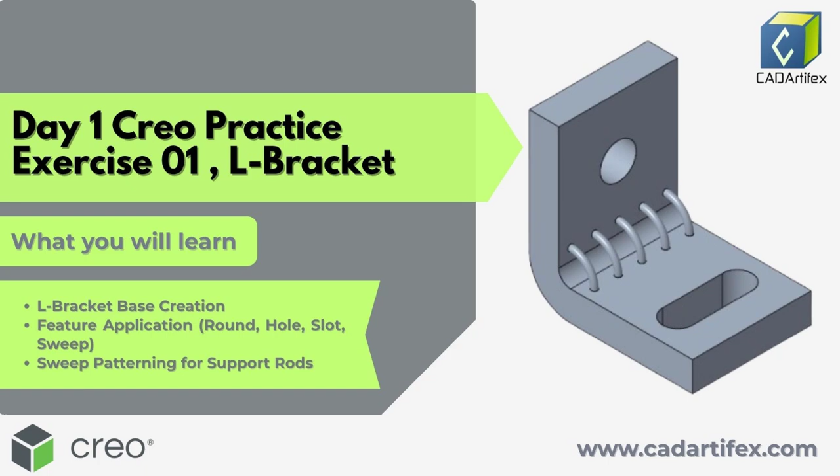In today's video, we're starting things off with a simple and useful part, the L bracket. It's a great model to get comfortable with the basics like sketching and using the extrude tool inside Creo Parametric. Don't worry if you're completely new, we'll go step by step and build it together. So let's open up Creo and get right into it.

Here's a quick look at the 2D drawing for our Day 1 model, an L bracket. We've got 2 equal arms, 55 mm long and 10 mm thick. There's a 12 mm hole on the vertical face and a slotted cutout on the bottom, 20 by 10 mm with round ends, and bend support rods with 2 mm diameter.

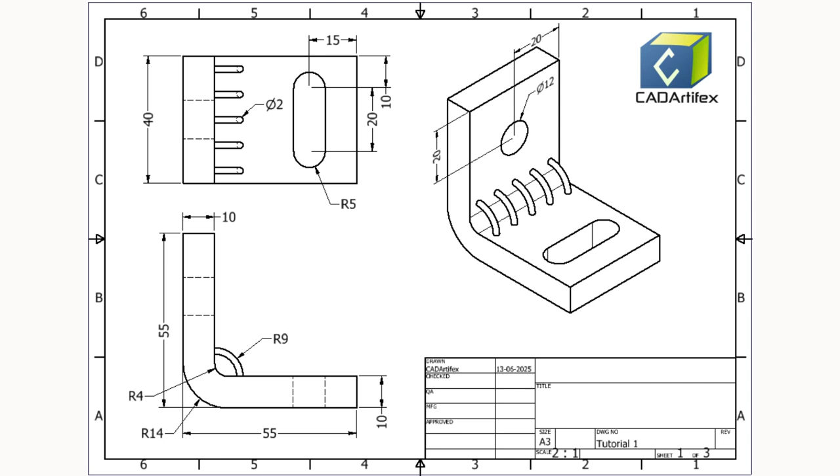And notice those smooth curves at the joint? That's a 14 mm and 4 mm radius blend. Simple design, but perfect to kickstart your Creo modeling journey.

Let's build it. Start a new part. Invoke the sketching environment by clicking on the new tool. Ensure that in the Type area the Part radio button is selected, and in the Subtype area the Solid radio button is selected in the dialog box. Enter the model name in the File Name field as L bracket. Uncheck the Use Default Template option and click OK. In the next dialog, select MMNS Part Solid Abs and press OK to proceed.

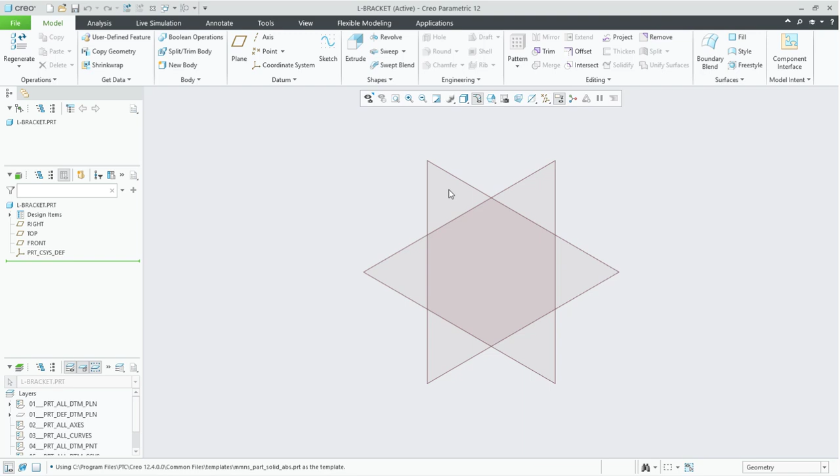Click on the Extrude tool and select the front plane. Now you are in the Sketching environment. Change the orientation to Normal by clicking on the Sketch View tool in the Graphic toolbar. Now we will create the L-shape extrude base feature.

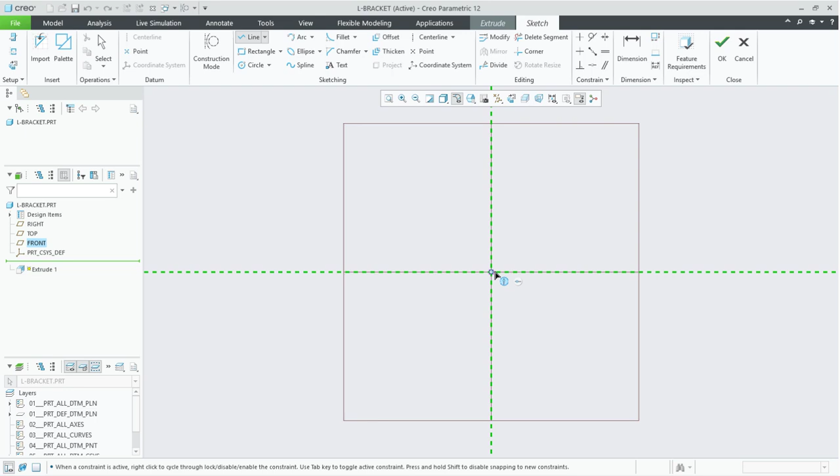Select the Line tool by clicking on it, move the cursor to the origin and click to specify the first point of the sketch, then move horizontally right and create a closed sketch similarly. Press the middle mouse button twice to exit the tool.

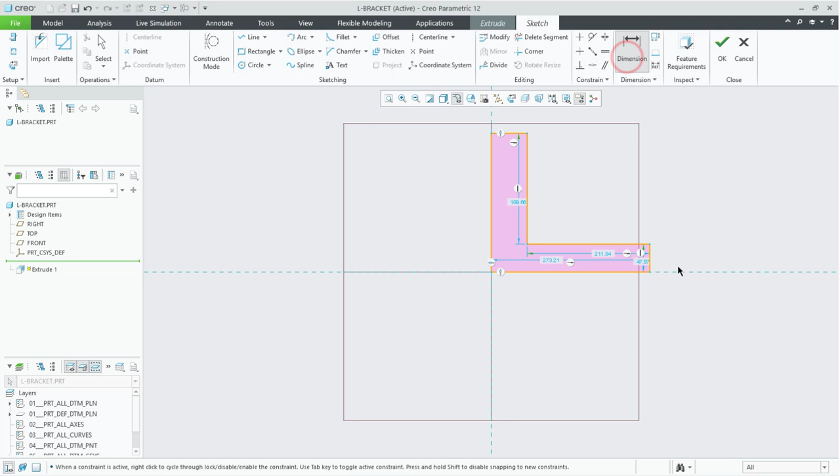Now it's time to change the dimensions according to the drawing. Click the Dimension tool and give this vertical line a value of 10. This horizontal line to be 55. Also this vertical line to be 55. And this horizontal line is 10.

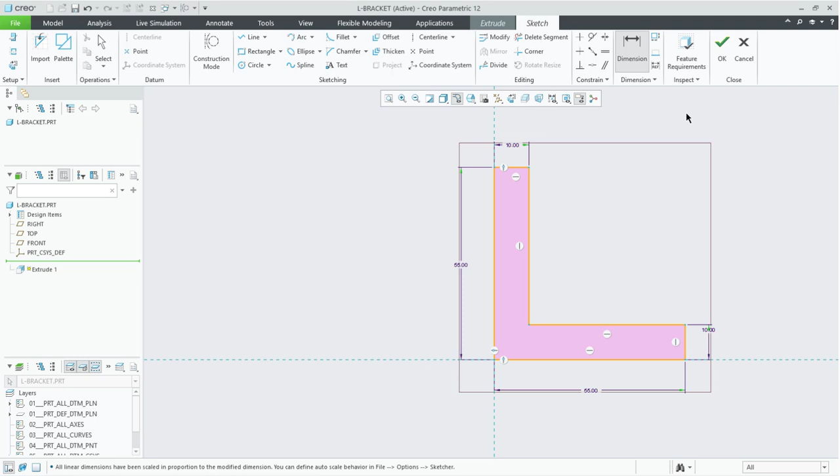Now exit the sketching environment by clicking on the OK green tick button in the Close group of the Sketch tab. Now you preview the Extrude Base feature with default parameters. First, change the orientation by clicking Ctrl+D or Standard Orientation in the Graphic toolbar.

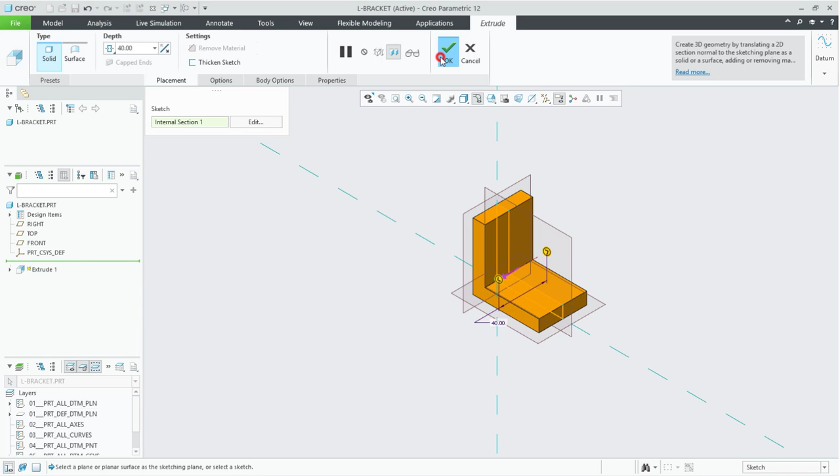Select the Symmetric option in the Depth option drop-down list and enter 40 in the Value field in the Depth area of the Extrude tab. Click on the OK green tick button in the Extrude tab. Now your base extrude feature is created.

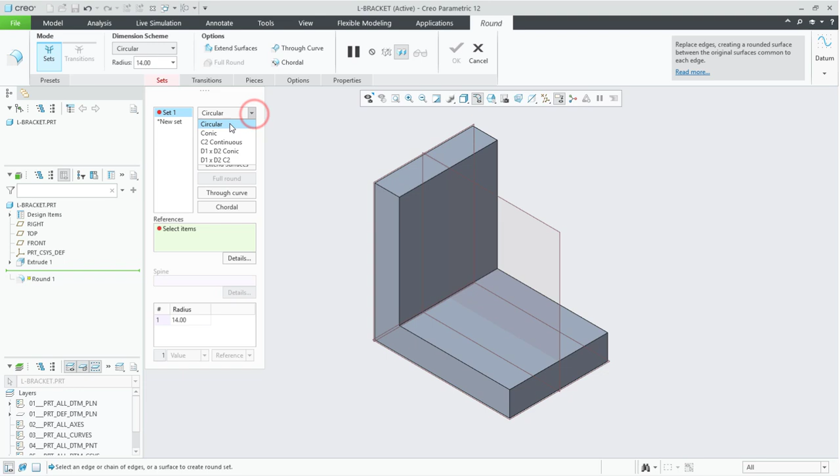Now it's time to remove the sharp corner by using the Round tool. Expand the Round tool flyout and select the Round tool. Enter 14 in the Radius field in the Round tab. Ensure that Set 1 is activated in the Set Collector field and also ensure that Circular is selected in the Profile drop-down list. Now rotate the model and select the outer intersecting edge. Now the Round feature appears on the outer edge.

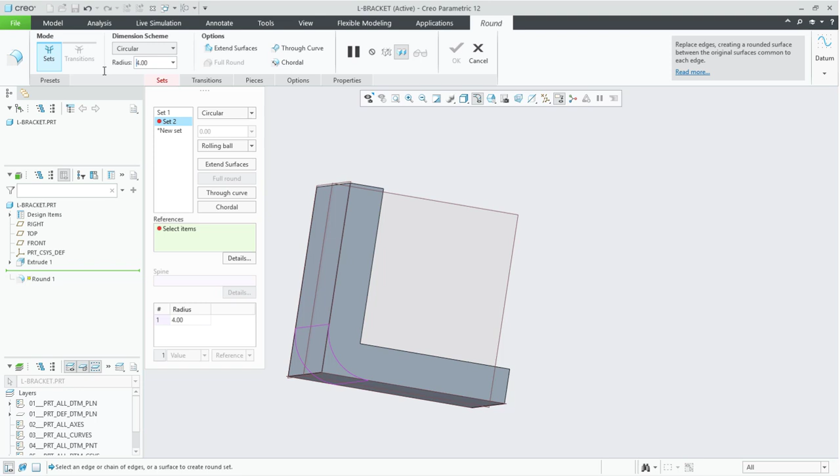Now click on the New Set button below Set 1 in the Set Collector field. You see that Set 2 is activated. Now enter 4 in the Radius field and select the inner intersecting edge. Exit the Round tab by clicking on the OK green tick button in the Round tab.

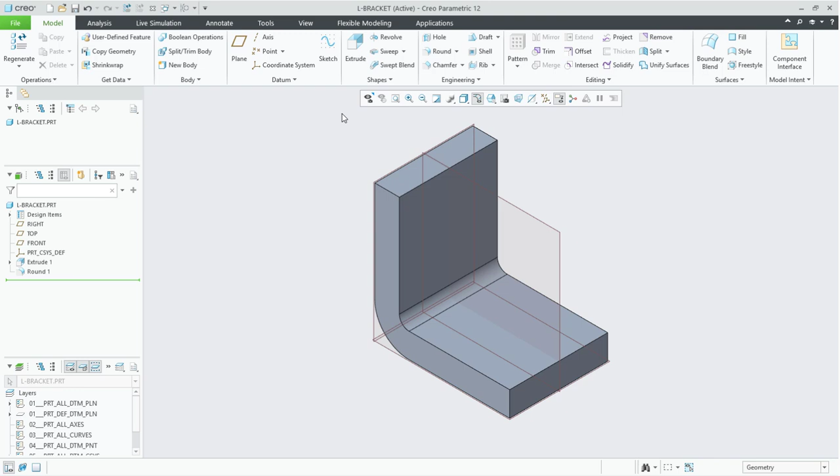Now change the orientation by clicking Ctrl+D or the Standard Orientation tool in the Graphic toolbar. Sketch the center-to-center slot. Select the Sketch tool from the Datum group and pick the top face of the base. In the Sketch dialog box, click on the Sketch button. Click the Palette tool, go to the Shapes tab and double-click on Racetrack 1 center-to-center.

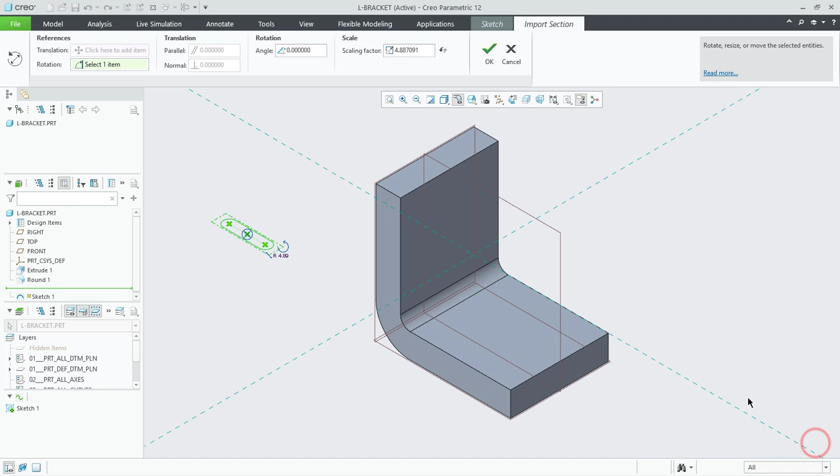Place it in the sketching area, then close the palette. Drag the center point of the slot to the base feature for alignment. In the Import Section tab, set the rotation angle to 90. Then click OK. Orient the view normal to using the sketch view, and add dimensions: distance between centers 20.

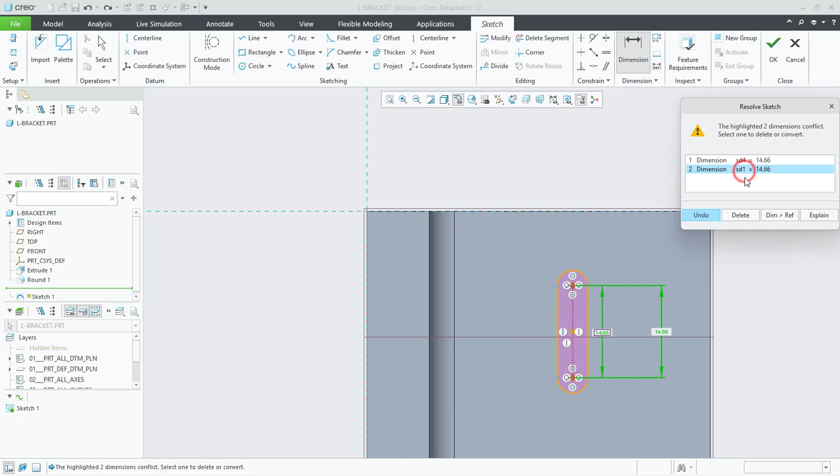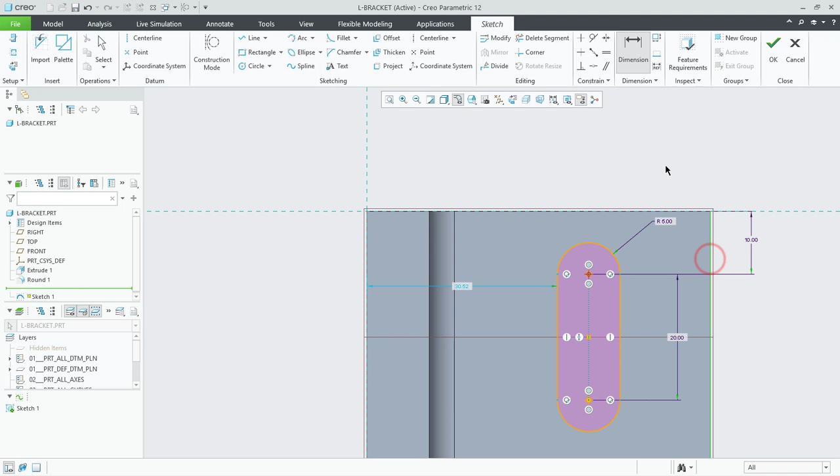If the Resolve Sketch dialog appears, delete any weak dimension and continue. Set the arc radius to 5. Set the distance from the arc center to the horizontal edge to 10, and the distance from the arc center to the vertical edge to 15. Once the sketch is fully defined, exit by clicking OK.

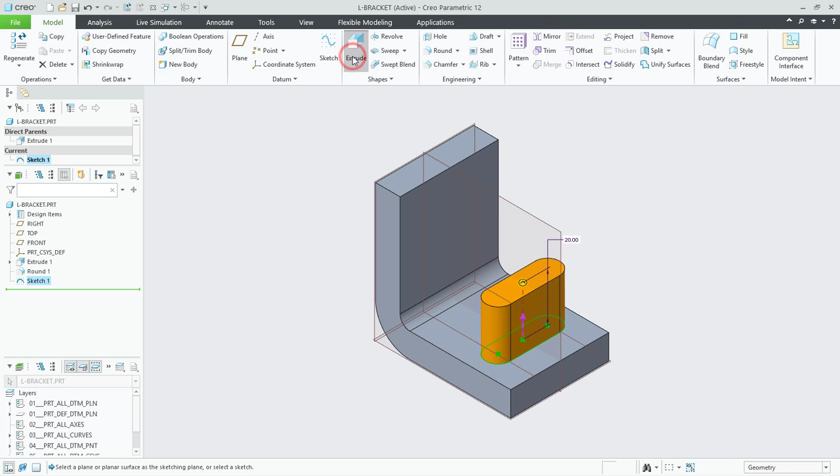Cut the slot. Now change the orientation by clicking Ctrl+D or using the Standard Orientation tool in the Graphic toolbar. Click the Extrude tool, click Flip, set the depth to Through All, and make sure Remove Material is selected. Exit by clicking the OK green tick button in the Extrude tab.

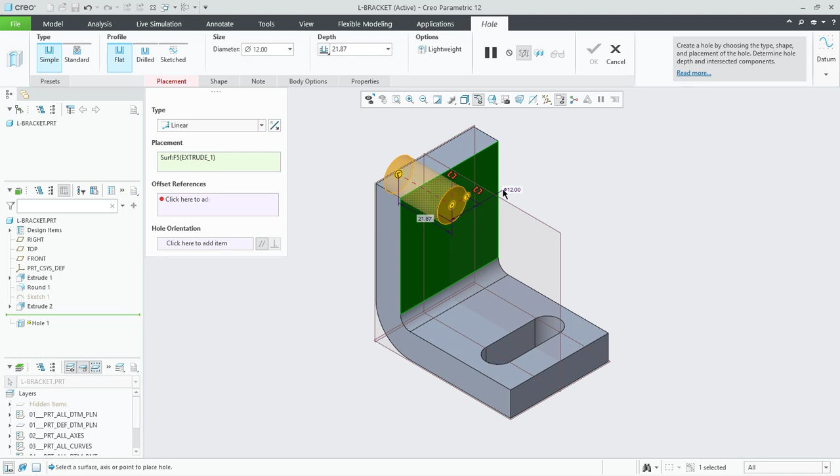Create the hole. Click the Hole tool from the Engineering group, then click on the right planar face of the base feature to place the hole. Under Placement, click the Offset References Collector area and select two edges while holding the Ctrl key. You can also drag the preview handles to adjust the placement. Set the value 20 in both the Edit field and the Offset Reference Collector area.

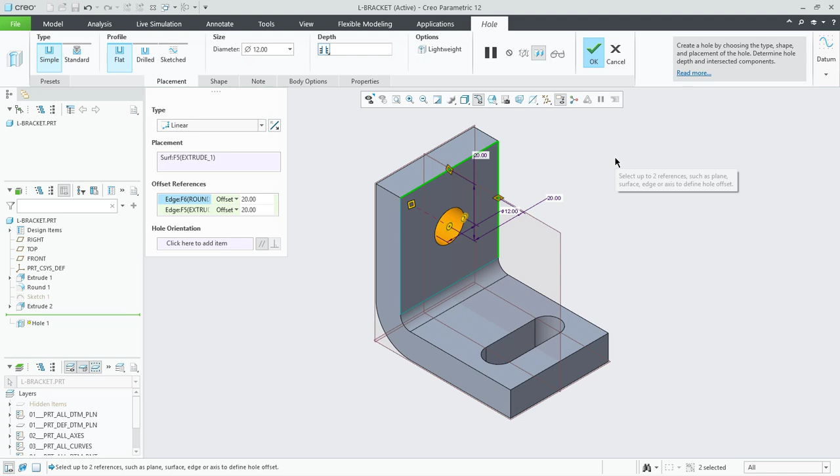Set the diameter to 12 and the depth to Through All. Exit the Hole tab by clicking the OK green tick button.

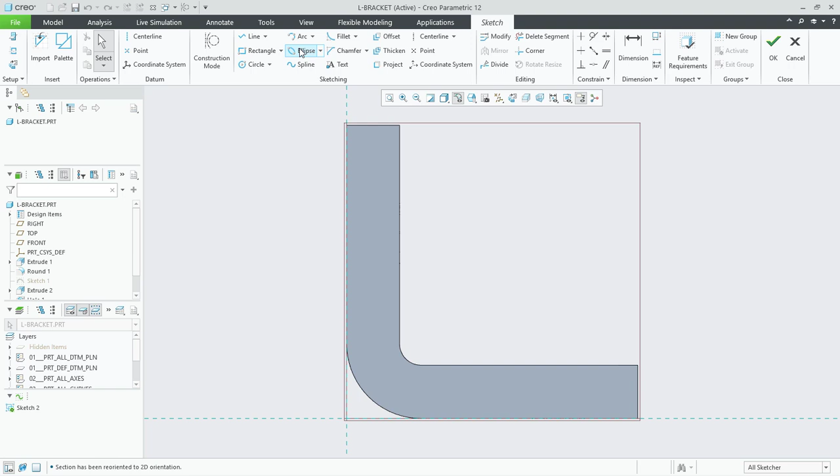Sketch the bent support rod. Click the Sketch tool and select the front plane, then change the orientation normal to by clicking the Sketch View tool in the Graphic toolbar. Select the 3-point/tangent end arc tool and draw an arc connecting the vertical and horizontal lines, applying the necessary horizontal or vertical constraints.

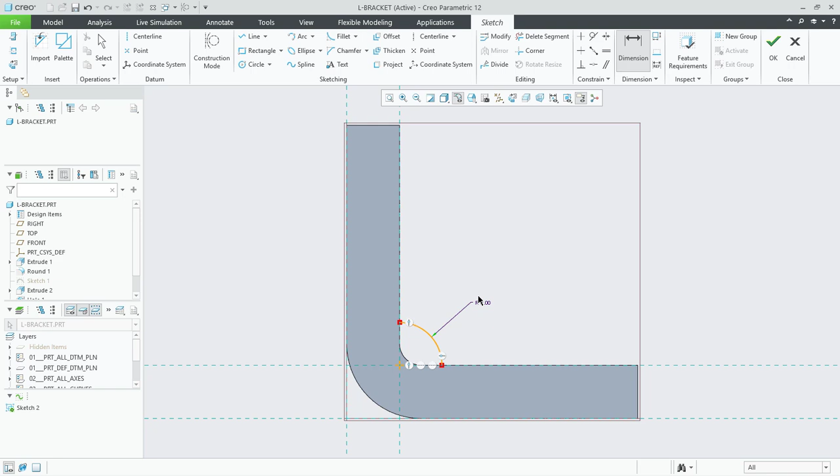Set the radius to 8. Now exit the sketching environment by clicking the OK green tick button in the Close group of the Sketch tab. Create the Sweep feature.

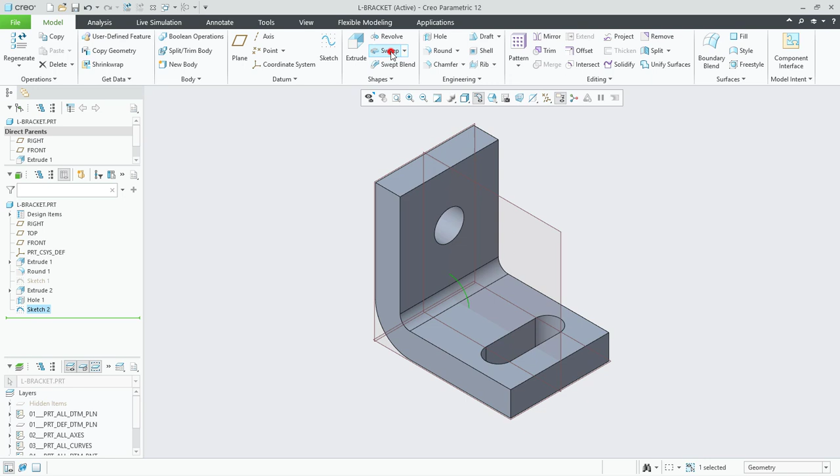Change the orientation by clicking Ctrl+D or the Standard Orientation tool in the Graphic toolbar. Click the Sweep tool from the Shapes group, and make sure Constant Section is selected. Click Sketch in the Section area to define the sweep profile, and draw a 2 mm diameter circle as the section.

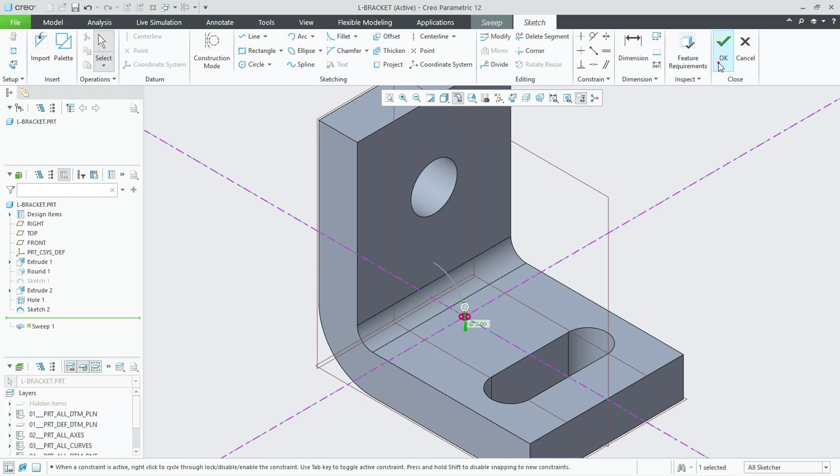Exit the sketching environment by clicking the OK green tick button in the Close group of the Sketch tab. The preview of the Sweep feature has appeared. Exit the Sweep feature by clicking the OK green tick button in the Close group of the Sweep tab.

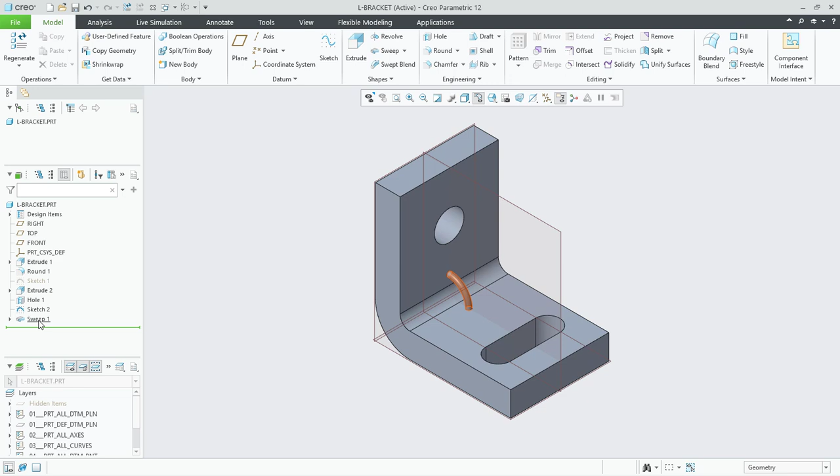Now it's time to pattern the bent support rod. Select the newly created Sweep feature in the Graphic area or model tree. Now the Pattern tool is enabled. Click on the Pattern tool. Select the Direction option in the Type drop-down list, and the Direction 1 selector field is activated.

Select the horizontal line and click on the Direction 2 selector field, then select another horizontal line, flip the direction in the Direction 2 selector field, and enter 3 members in both directions, giving a spacing between them of 8.

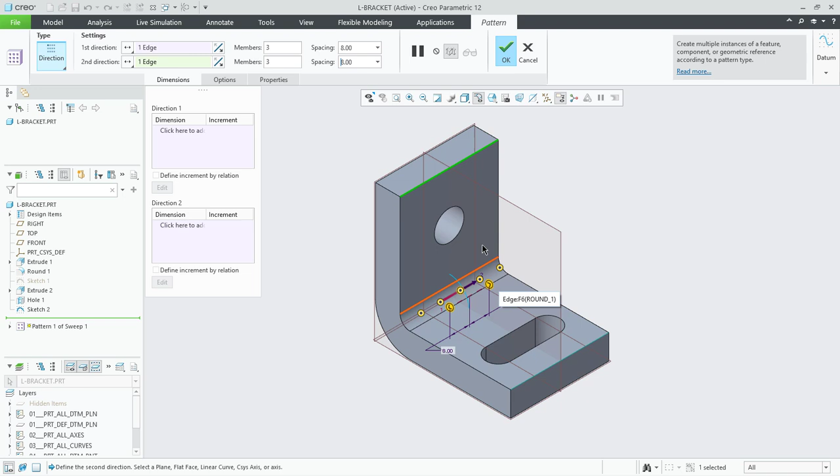Exit the Pattern feature by clicking the OK tool in the Close group of the Pattern tab. And that's it for day 1 — we've just finished modeling our first part, the L bracket.

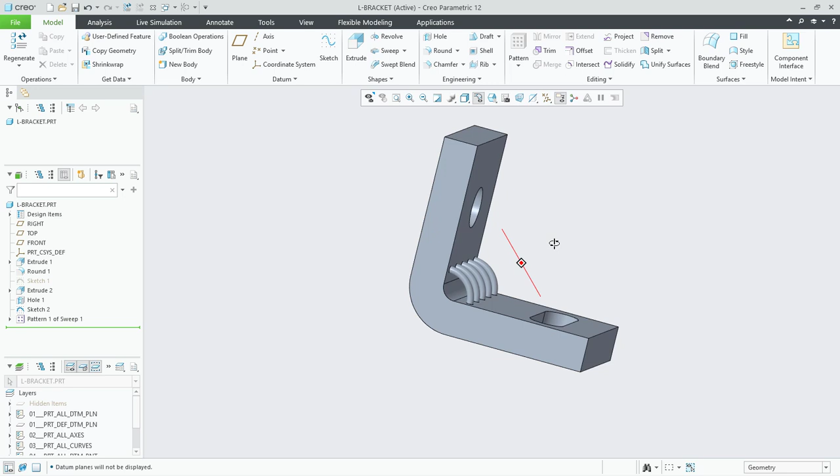Great job if you followed along. Every step you take builds your confidence in Creo. Don't worry if it wasn't perfect — that's what this 30-day challenge is all about, learning by doing.

Now get ready for day 2, where we'll be modeling a U-clamp. It's going to be a bit more interesting with some new features to explore.